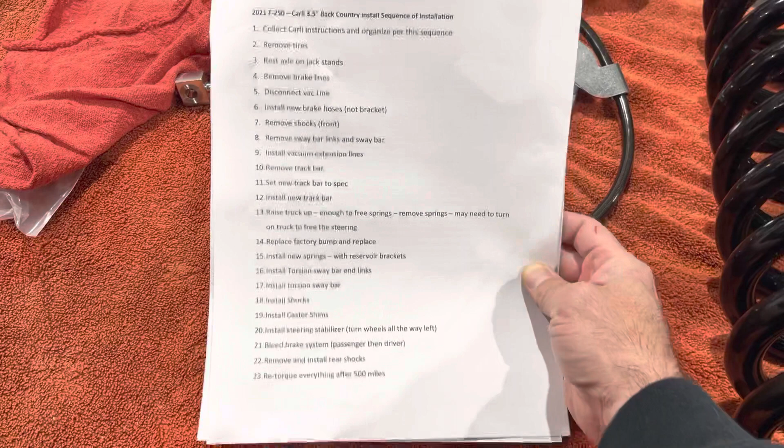First things first, I did a sequence of operations for how I'm going to disassemble and reassemble everything. Went through and figured this is the best way. If you want to pause, take a look - that's how we're going to run this.

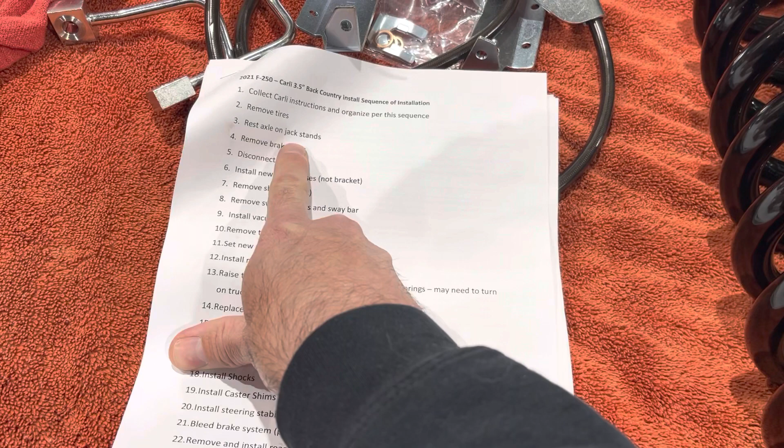I'm going to jump right into this. First things first, now we're going to start with removing the tires. We've got the front axle resting on some jack stands, so we'll start with removing the brake lines.

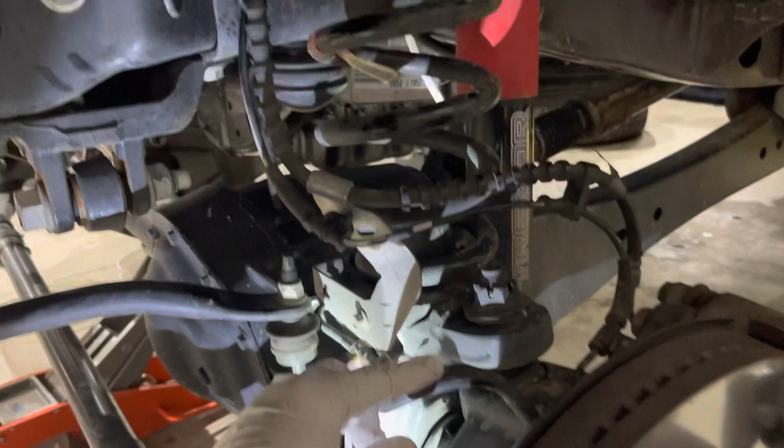We're starting off with the brake lines. We got the right side done already, moving on to the left side, driver's side. We're just disconnecting the ABS line right here, and we're going to disconnect the bracket, pull this vacuum hose off, and then we'll get to that spot in a sec.

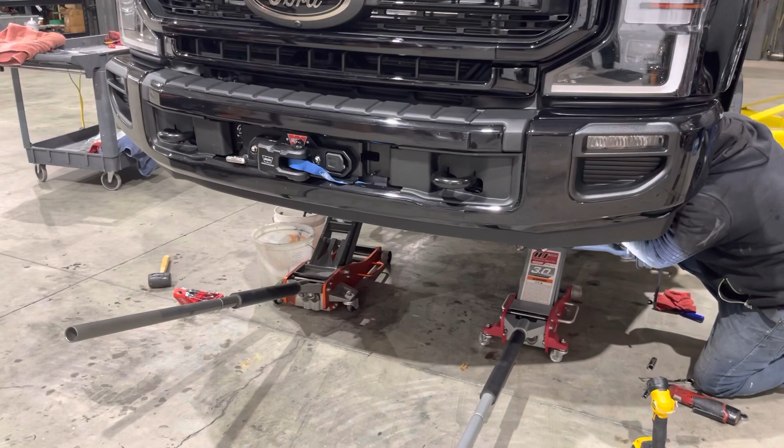I'm just going to talk about setting up the truck in the proper lift points and setup for this. Since we are going to droop the axle down, we are going to use the lift. But if you didn't have a lift in your garage and want to do this without one, same concept - you'll just have to lift the truck and support the axle with jack stands or jacks. This is the start of it here, and we'll be able to use the lift to raise the truck up and down when it comes to pulling out the springs and all that good jazz. So we'll get these brakes done and we'll be good to go.

All right, so we just disconnected the hard brake line from the flexible line. We'll end up pulling this out right here.

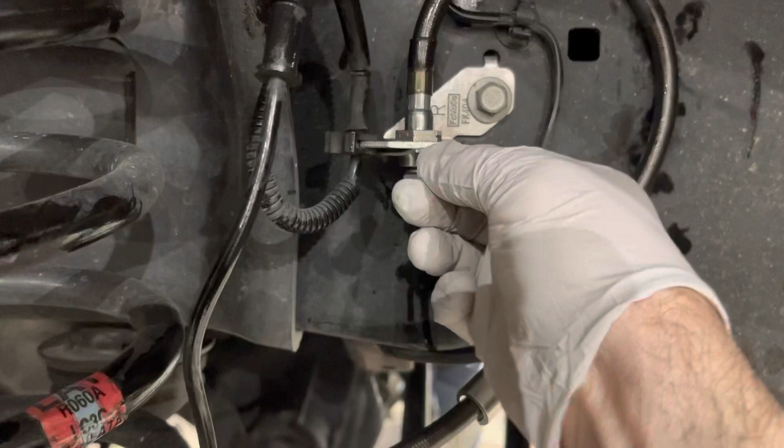All right, this right here is the passenger side. You want to make sure that when you refasten this, you've got a little clip that goes in and holds everything in place - that comes from Carli. This is the new Carli line. You want to make sure it routes around and touches the frame, comes down. We're going to leave that bracket loose for now. We just screwed that back in, and then we have our ABS and all that - we're going to secure all that later, leaving it loose for now so when we pull this out it doesn't get in the way.

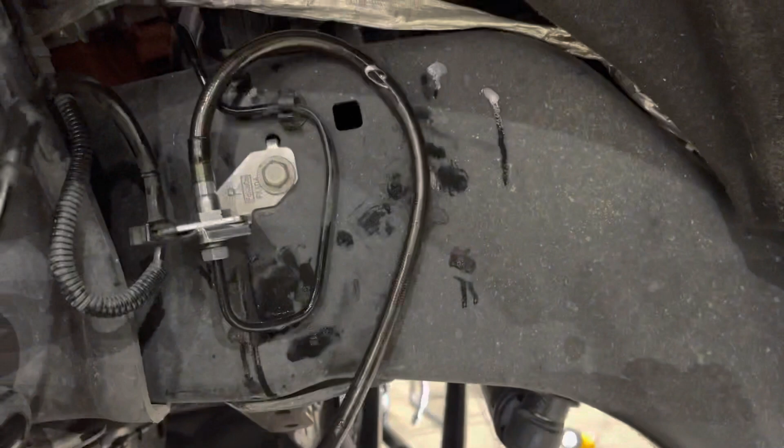And we are down, and we have used the two crush washers in there, and this is how it routes right up and over - pretty simple. Once you pull it apart, you'll get the gist. But the big thing is to make sure this is touching the frame and not sticking out in the wheel well.

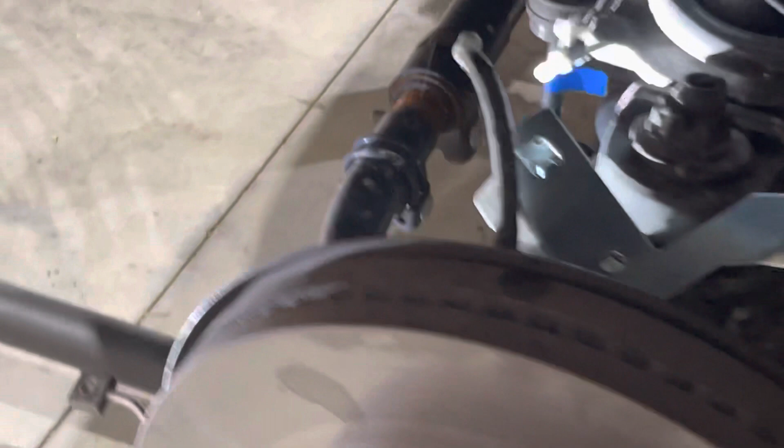Dripping fluid - we're catching it. Or are we? No, we're not. Oh well.

All right, brake lines are swapped out and hanging. We're going to move to the shocks - that's the next step here. We're just going to pull the front shocks off right now. We're not going to replace them yet, but we're going to get these shocks pulled out. We got a 21 millimeter at the top.

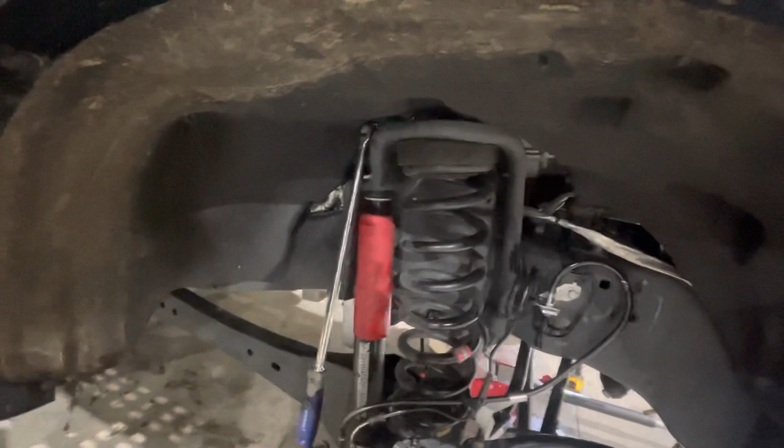We're using some pliers, some channel locks, or some Milwaukee's right in there - it's real skinny to get a wrench in. Got that, and we're going to throw a battery powered ratchet on there now that we broke it loose. Now we'll undo the lower shock mount, 19 millimeter socket, ripped right out.

All right, shock's off. We're on the other side, knocking it out. That's it - just getting that 21 millimeter loose. It's tied all the way up, all the threads, so I'll end up using a ratcheting wrench. It was easy, just how tight it is in there - couldn't get the battery ratchet in there. So food for thought: 21 millimeter and 19 down there.

Okay, we are now at number 8: remove sway bar links and sway bar. So we're going to go over and get working on this thing. We'll get the end links off, take those off first, and then move over to these brackets. I heard they're pretty damn tight, so we'll get the sucker removed.

Get these nasty little end links off. All right, sway bars off. Here we go.

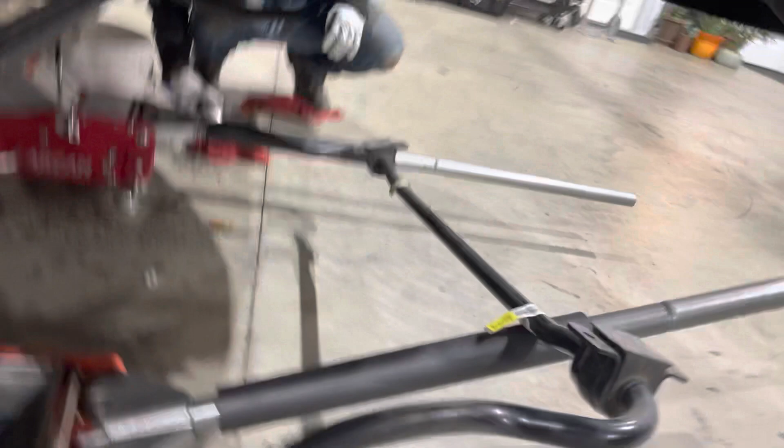And that's that. Replace this with the good old Torsion one. What we've been waiting for the past 5 months. Easy enough, moving on to the next task.

All right, we're moving on to the track bar. We're going to set the track bar first, then remove and install the new one at one time. We'll swap 11 and 10 if you want to. So first thing we're gonna do is clean the threads here.

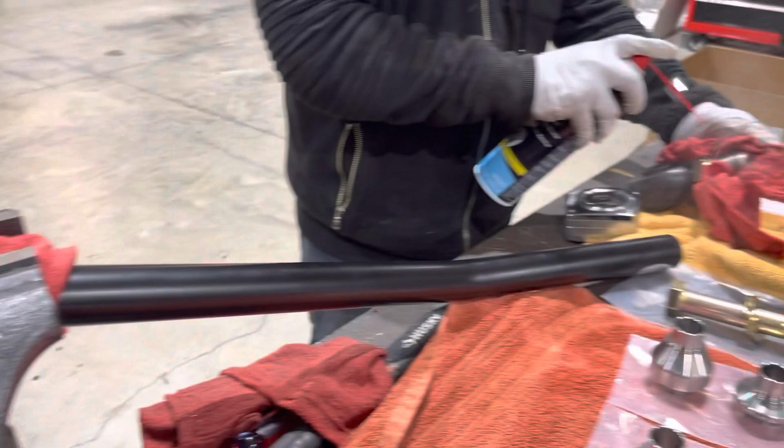We've got it pulled out, got it in a vise. I think Carli, or CJC, has a good video on this, but we're gonna set this thing to spec, 37 and some inches here. Put some red Loctite on it and go from there.

All right, we got it cleaned up. We got some Loctite on that sucker, and we're gonna go 37 and 5/16. So we got to go in 3/4 of an inch.

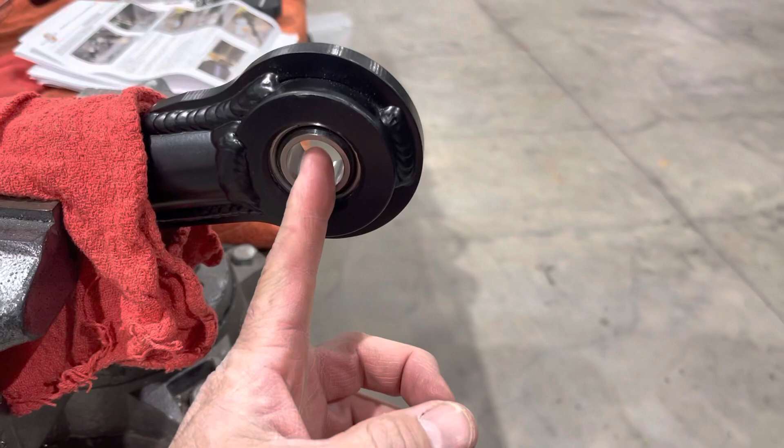All right, we measured it. We're at 37 and 5/16. I just put my knife in right here, had it come out in the middle, kind of as a marker. I mean, we're within, I'd say, less than a 16th, right where we need to be.

And we got our crow's foot on right here. We're torquing this thing down to, we're setting the torque wrench to 200. We're gonna use our crow's foot attachment there and crank it down.

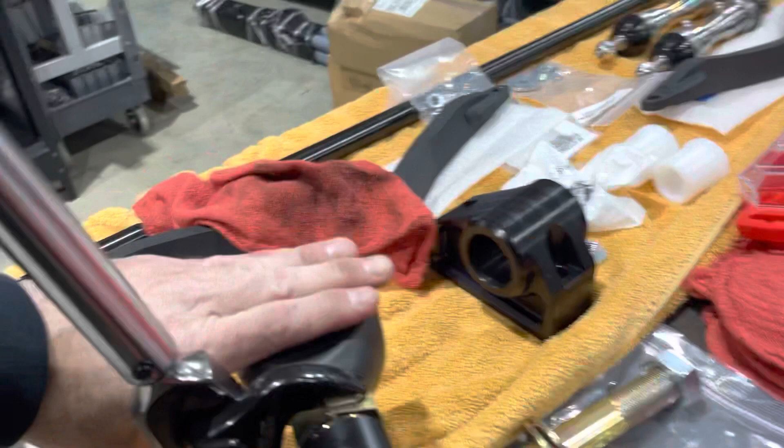All right, now we just want to make sure we got this thing nice and straight. We got a perpendicular on this thing, make sure this thing's level. So this wants to sit flat, and this wants to sit up and down.

So it's gonna take 2 of us. Be back with you in a sec. Trying to keep it level. It's moving, of course it's moving. Just kidding. All right, we relocated that to hold it nice and tight because it kept spinning the bar.

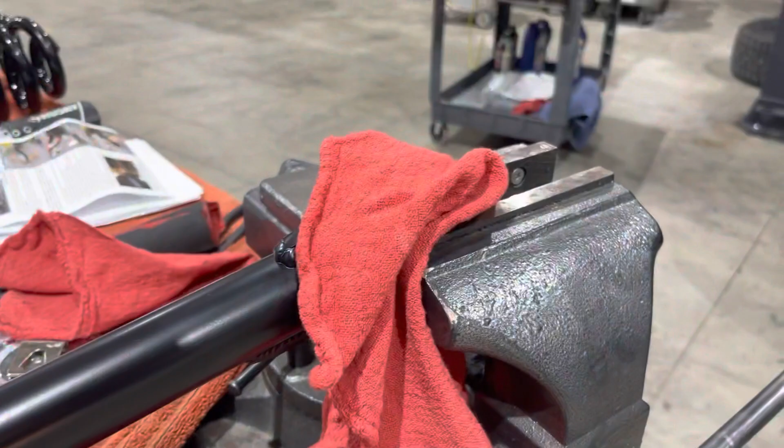So here we go. Jeez, all right. Boom, we're good. All right, we're starting on the track bar here.

30 millimeter, start off the top, get that loose, then we'll go down and work that ball joint. All right, get this ball joint out.

We're gonna have to use the puller. Not a big deal, so we're getting that in place right there. 17 millimeter, pull the sucker right out, and we'll be in business.

Just keep in mind where you place your jacks. This one's kind of in the way, but we're working around it. And obviously, if you're redoing the radius arms, you wouldn't want the jacks here either. Probably go on the axle, one on the axle and then one under the diff.

So let's get the sucker pulled out. How is it, is it tight? It can't.

All right, there's the 2 bars together, and you can see, line them up. Not much difference, huh? I don't know if the Tremor comes with a different track bar or not, but we're swapping this one out.

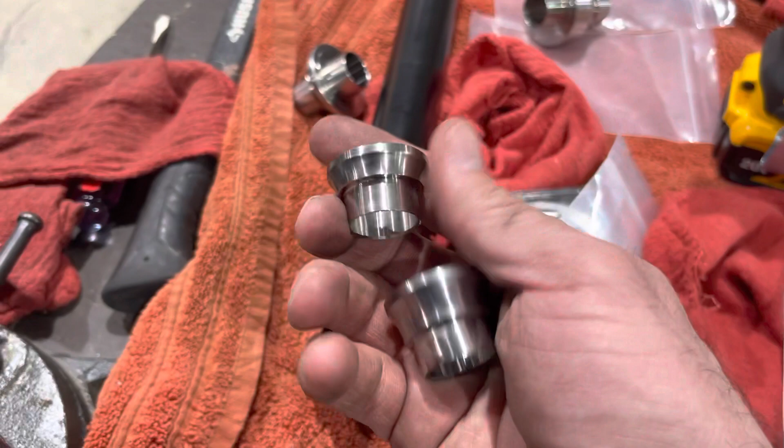All right, we're getting ready to get this thing, the track bar, on. It comes with 2 of these. This is going to be towards the front, this is towards the back. Thin one, front. Thick one, back. All right, we're good.

Let's get this thing in place. Okay, we got the track bar up on driver's side. It's in there loose right now. Used a rubber mallet, a little bit of persuasion, got it where it needed to be.

All right, we're just using the pick to get these spacers in place around the rubber gasket. Should have done that earlier, but we didn't, so now we're doing it now. Don't forget. All right, we got her in, made sure it's all the rubber seals around the spacers.

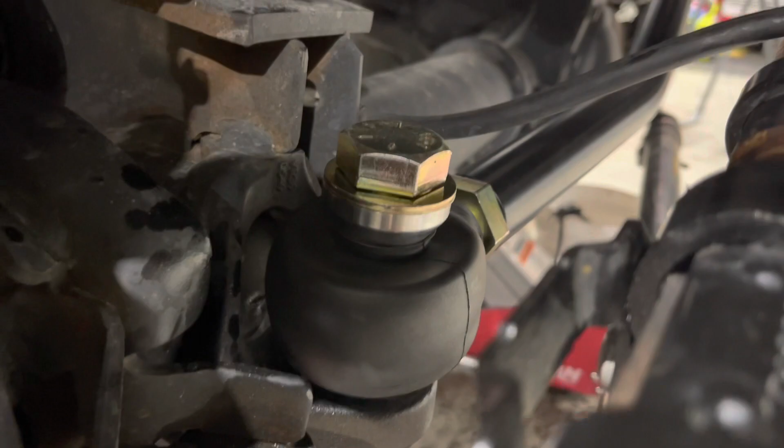We're going to torque this thing down to 250 foot-pounds with a 33 millimeter.

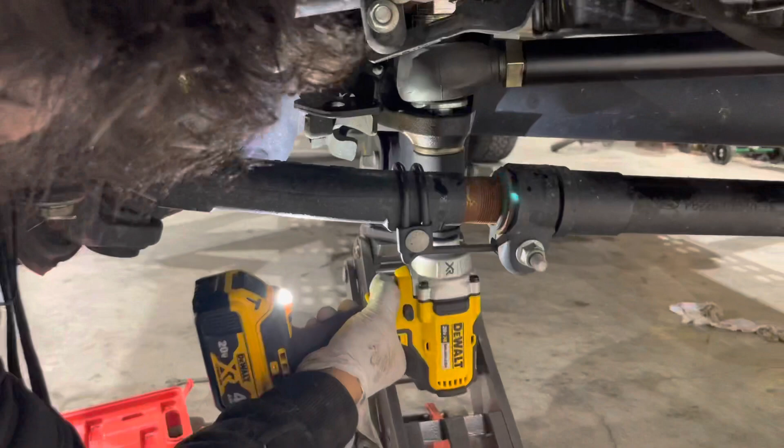Torque it down to 250. I'm going to set this down because I can do it one-handed. Here you go, you hold that. Boom.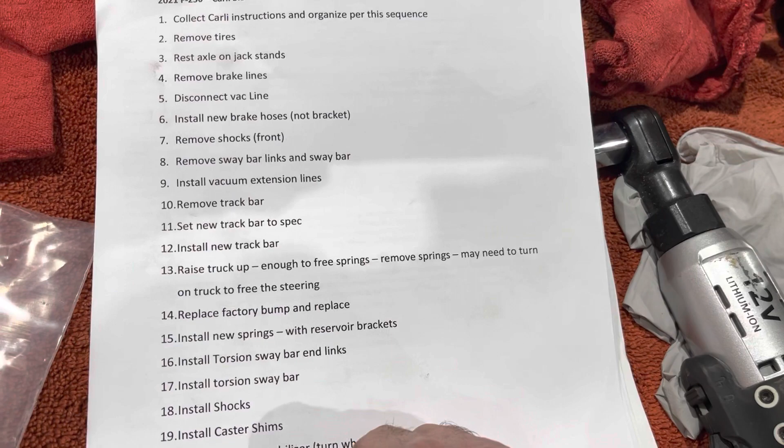All right, we're gonna raise the truck up to free the springs, remove them, and we may just turn on the truck to free up the steering a little bit. Let's get these springs out.

All right, well, you guys came too late. You missed us pulling these out. They came right out. We got a rubber gasket over there. Everything's good to go.

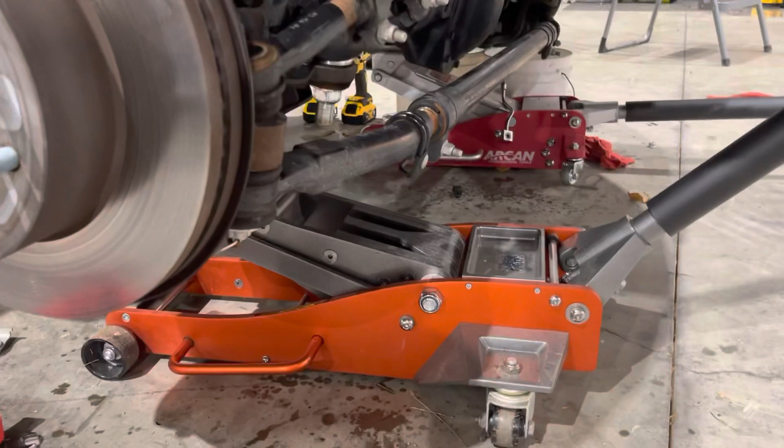All we did was lower these jack stands right here enough to get the coils out. But you really want to make sure you've got your track bar in place to hold your suspension together.

And we're not doing radius arms, so put the new ones in, and we're gonna work that shock tower bracket for the reservoirs. All right, we torqued it down.

Put this little rubber guy back in. He just snaps right in. That's all she wrote. Fancy.

All right, bump stops are replaced. Now we're gonna put the new springs with the reservoir bracket. Here we go, let's do a comparison.

Oldie and the new guys, here you go. A lot different. All right, let's get to it.

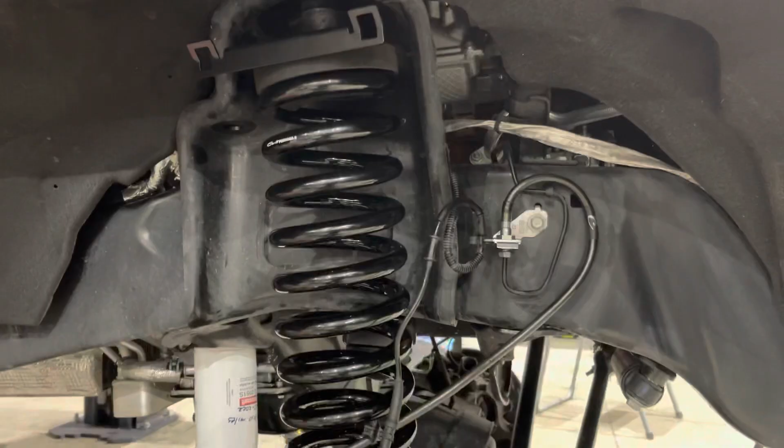All right, we got the first coil spring in. Don't forget your bracket, and there we go. I think we're gonna leave it to where it says Carli Ford 2.5 right there. We should be good to go. It's tight, man, it's tight.

The vacuum line on the diff is stretched to the max, so let's get the other side. So this taper here, what we want to do is insert it up there first with everything, then get it in and slide it in this way. All right, it's a pain.

I'm gonna try lowering just a little bit. Oh yeah, that's gonna help you big time. You're in now, you're in. There we go. A little finesse, I think we're good. That's it, beautiful. That coil's gonna sit where it sits, right? Yeah, that's it. All right, coil's gonna sit where it sits. That's what she said. All right.

All right, moving on. Install torsion sway bar. All right, we're on it. So we're gonna get these bushings in the bracket, and then we're gonna drive them onto the spline here.

And that's gonna get this basically set up to fit up into the truck. I know we're gonna leave 1.25 inches sticking out here, but we'll get to that in a second.

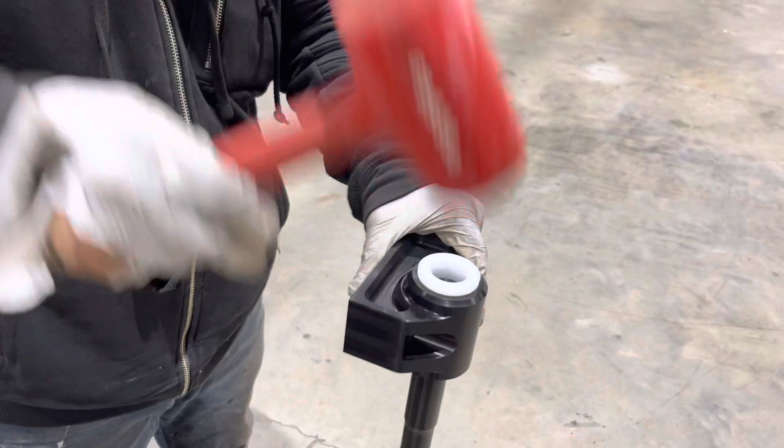All right, first one, got a piece of wood down there. Mallet this thing on, and once that spline comes out, we're gonna use this socket and slam it down 1.25 inches more. All right, we got it down to 1 inch. Inch and a quarter on the money right there. Boom, good. All right, repeat.

Do the same side, make sure it's even, even Steven right there, and you'll be good to go. Okay, next we got this sucker ready to go on.

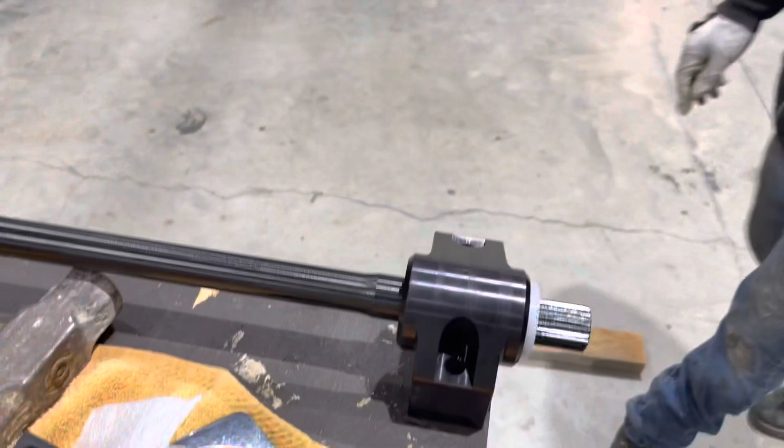We're gonna take some studs out where the old sway bar was, and those will pop right off with some clips, and then we'll install these guys, prep it for this torsion bar.

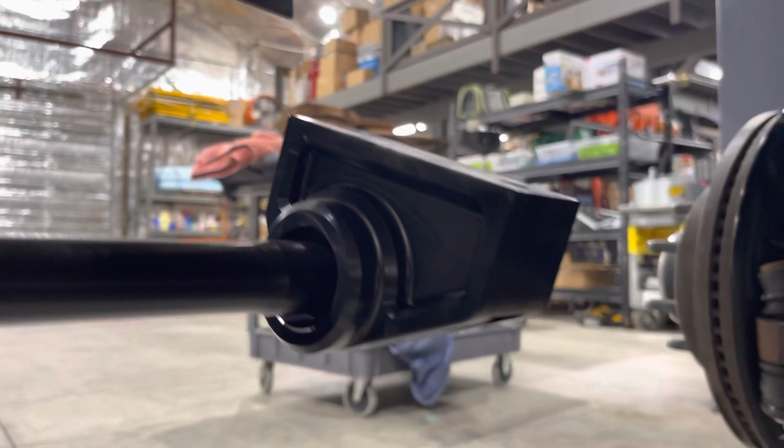Okay, now that we got these little brackets in, we're gonna go ahead and throw the bar up. Long side to the rear, short side to the front. All right, we're gonna hand tighten these for now.

Since it's gonna take 2 people, I'm gonna stop recording. We got it one in there. You're gonna probably want to pick it to realign the bolt up with the actual threaded bracket behind the frame there. Using a 9/16 deep socket is a great way to get your fingers around that bolt. So, little tricks of the trade there.

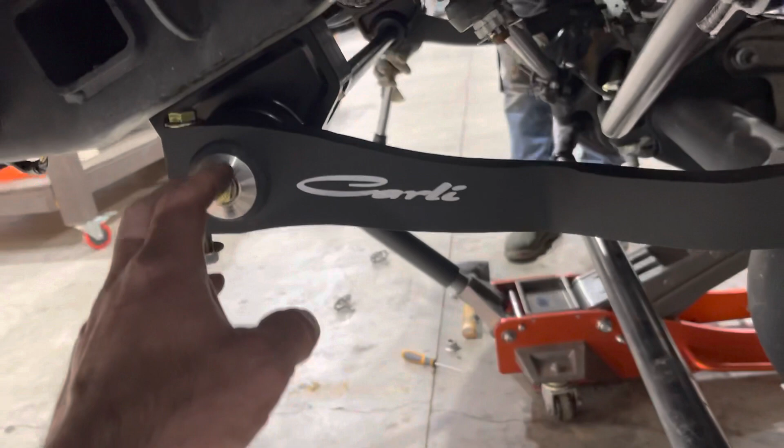All right, so kind of got ahead of myself here, forgot to film this part, but we installed this bracket with the torsion bar in it. So we hammered the spline on, and it's great to have 2 people on this to make sure it's lined up. You can see if the spline's off, it could screw everything up, but it goes right on.

So what we've done here, we get it in. You hammer it until you've got a 1/16 of an inch from the spline to the outside face of this bracket, and then you put on the large washer, the crush washer or lock washer, and the 3/8 bolt. And then what we're doing now is we're torquing it down.

Driver's side 10, passenger side 10, 15, 15, 20, 20, and I think we're on 25 now, right? Yeah, and that's it. We torque it down to 25, and we'll double check each side, but it's important that you alternate and preload that torque all the way to 25 evenly from left to right, whatever. It's been a long day.

But yeah, here we go. All right, here's the other side. So this is a 9/16, and this is a 9/16, and that's a 9/16. So this is all 9/16 here. What we're gonna do is get a 9/16 wrench and a socket and get that one down. Both sides, we're gonna pinch this thing to 35 foot-pounds.

Now we're torquing, going back to the spline bar there, the brackets, and we're torquing that down to 40 foot-pounds. Previously, we just hand-tightened them to 5. So that pretty much squares away the torsion portion of the install.

Okay, end links, here we go. So one thing, look, these are loose. If you can move them by hand, we have to undo the set screw, tighten this down to where these are kind of difficult to move, reset the set screw. So I'm gonna go ahead and do that.

Go from there. All right, and I'm gonna use some blue Loctite on these set screws here because, well, you over-torque them and it ruins your day. So make sure you blue Loctite your set screws throughout.

All right, so what we're gonna do here is install the bottom first, thread it a little bit, and then bring the top in. Make sure your grease points are accessible. You've kind of gotta grease that every 5,000 miles. So we're gonna get to it.

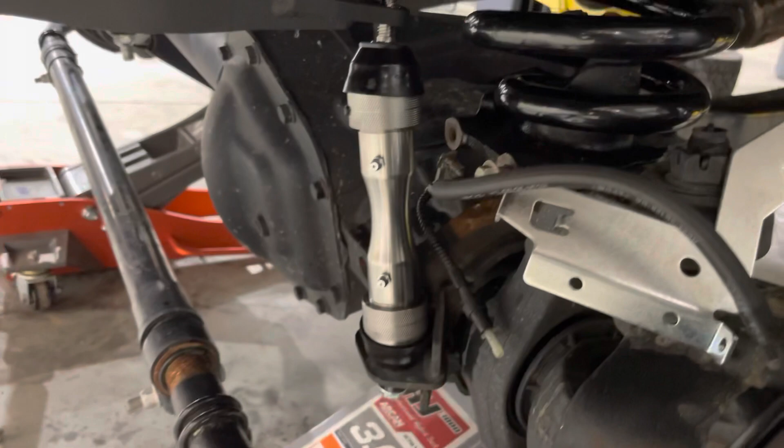We got that in place. Since it's at full droop right now, probably more than full droop, we are going to— these are at an angle, so we're gonna go ahead and use a 5/16 up here and an 11/16 to tighten this sucker down. Hold the stud in place, tighten it down, boom, boom, and I'll be back with the torque specs. But that's what it looks like so far.

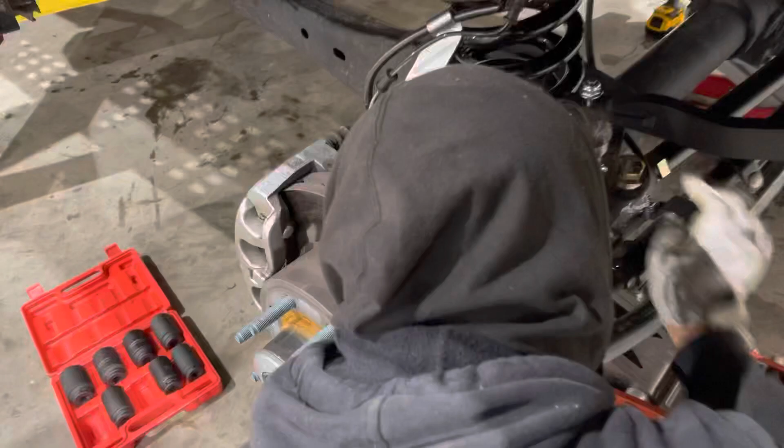Sick. All right, got the grease gun. I'm greasing. He's torquing these things down right now. You can see.

Making it happen. We're gonna torque these down to 30 foot-pounds, I think — gotta double check the spec. All right, we got these things torqued down to 30. Greased them up. Looks like, is this a Zerk fitting? Looks like it's squirting out there.

They're tight. But yeah, we greased them up, they're ready to go, and now we're gonna move on to the shocks. Let's get them in.

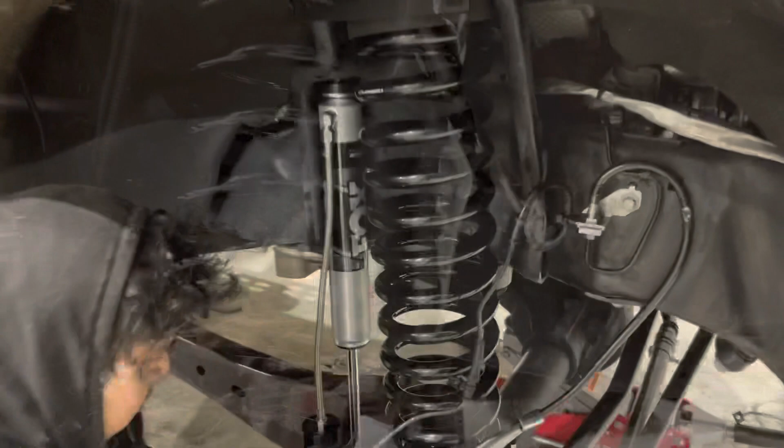All right, we're getting the shock in. If you follow the directions that Carli gives you, it just doesn't work. Stickers definitely don't line up. I know they say don't worry about it, but we're gonna mess around with it here and see what we can do. Not the end of the world, but yeah, that works just like that.

All right, so we just angle it. Yeah, we'll just angle it there. That's a good look, perfect.

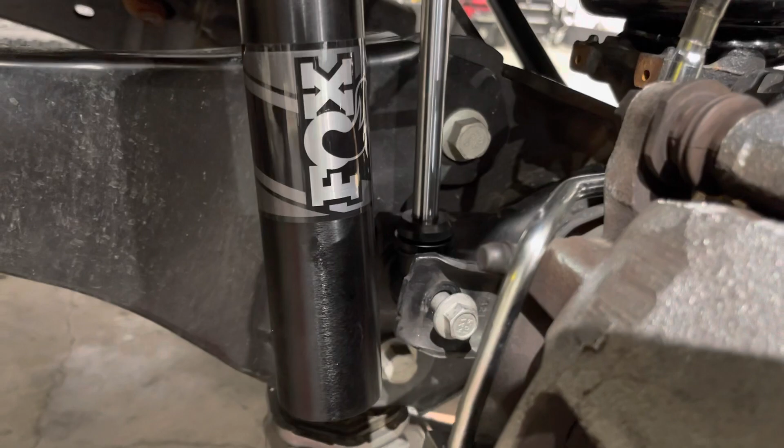All right, we'll get these things tightened up. Instead of compressing the shock, we just put it in and droop the suspension. It's easy because we've got the jack stands—really helpful to do it that way. We got that, and we'll torque that thing down to 100, and then we'll get working on the top.

All right, for the top, we're just going to torque that down till it preloads the bushings. Kind of use your best judgment there—you don't want to overdo it, and you don't want to underdo it.

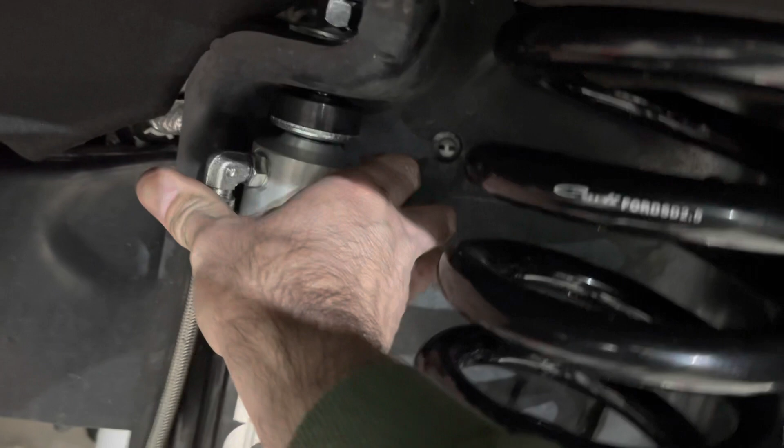All right, just make sure you angle this correctly. Double check to make sure your reservoirs are where you want them, and by swinging the shock left and right, you can go from there. So keep that in mind. Ours is going to be about this location here on the passenger side.

All right, we got the shock in place. That's where I have it right now.

It's pretty flush here, and it starts sticking out, but that's where this sits. So mess around with it. It's easy to move around, undo the 2 screws up here or hose clamps, and this thing spins. So I can adjust that later on when I pull everything off at 500 miles.

Did that, and we went ahead and torqued down this new bracket. Then we ran our vacuum line through it back in place. I'm probably just gonna cut this little clip that used to clip in the old steel bracket here, but I think we're just gonna zip tie this here to 2 spots. Boom, boom, call it a day.

The ABS, and we still gotta bleed, but I've got a few more things to do here, but there it is, and repeat on the other side.

All right, now that we have the shocks in place, that's kind of our limit strap to keep the suspension from fully falling out from the truck.

So we're gonna get up and we're gonna get that steering stabilizer replaced with the new badass one. All right, but yeah, so far that's where we're at.

You can see everything's kind of shifted, it just droops. And that's where it is, but obviously when we compress it back up, it should line back up and drive straight, in theory. All right, but this is where we're at so far.

Pretty sweet little setup here. I really got to watch these hoses. I'm not a big fan of how they're sitting, but I'll keep you posted. All right, let's get it done.

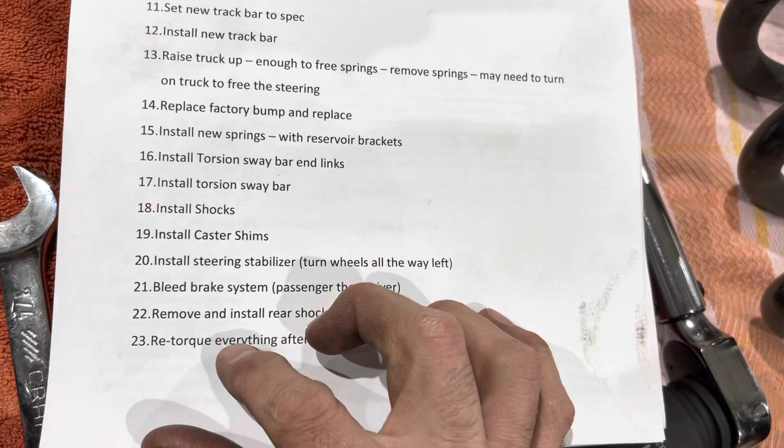Okay, we installed the front shocks. I said shocks, I got rear shocks somewhere. Yeah, right here. Okay, but instead of doing the caster shims, we're just gonna do the steering stabilizer first, then we'll move to the caster shims. Go from there.

All right, got that stabilizer off the frame right here. You can see it's hanging. Now we're gonna have the drag link here.

The word on the street is it's a pain in the ass to get out. I don't know, you tell me. So we're gonna work at that. We could use a puller, a sledgehammer.

Don't hit my... All right, now we're gonna get the steering stabilizer on. Got the hardware, we already got the bracket and the wedge up there.

Well, bracket's in our hands, but there that is. Put that in, and we'll go from there. All right, we got it in place.

Torque it down to 40 pounds per square inch. No, pounds per foot. That's right, foot-pounds. Whatever you want to call it.

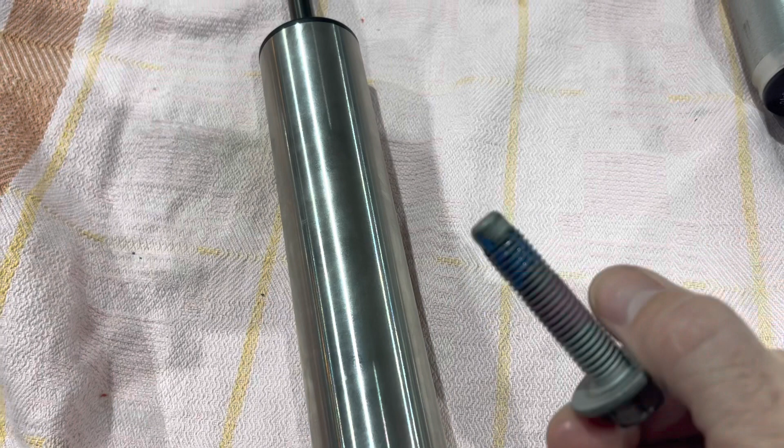Okay, so we got blue Loctite on both ends of the stabilizer. This is the original bolt from the original stabilizer. Put a little on that, and that's going to go towards the frame. And that'll go on the other side.

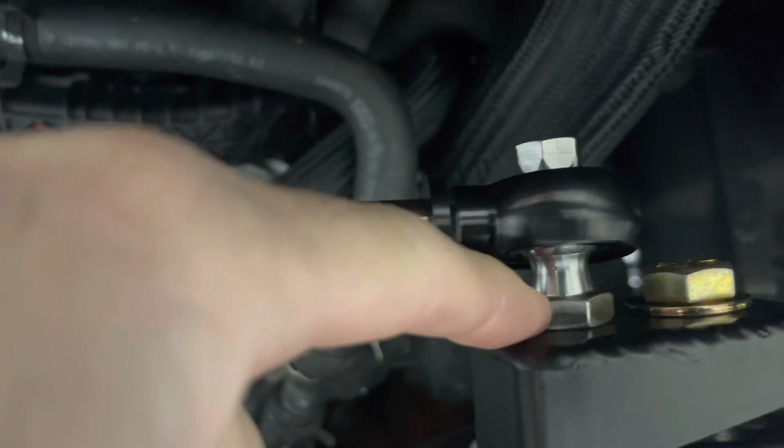And the drag link. All right, we got the drag link portion installed. Do it from here, not here. This could break, so you want to use a 3/4 on that guy.

All right, we're gonna go and throw it up on the frame now with the existing bolt and the provided spacers.

All right, we push this sucker in. Make sure you have your wheels turned to the left. And we pushed it in, threaded up the existing bolt. Now we're gonna torque it down to 30 pounds with the 15 mil.

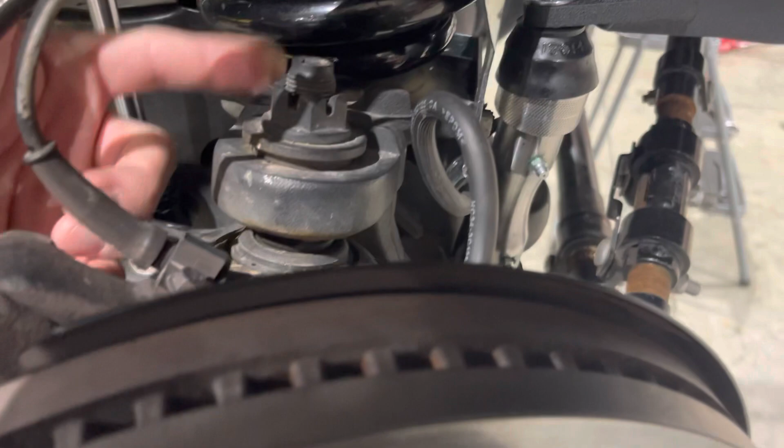Now we're gonna work on the caster shims. Gonna remove this castle nut. It's got a cotter pin, we already got it out. We'll get that up, bring it up, and there's plenty of videos on YouTube on how to do this one and all that. So these should come out pretty simple.

We'll move it up here and then slam it with the socket until this rattles loose. Pull it out, put the new one in, and move on. Torque it back down.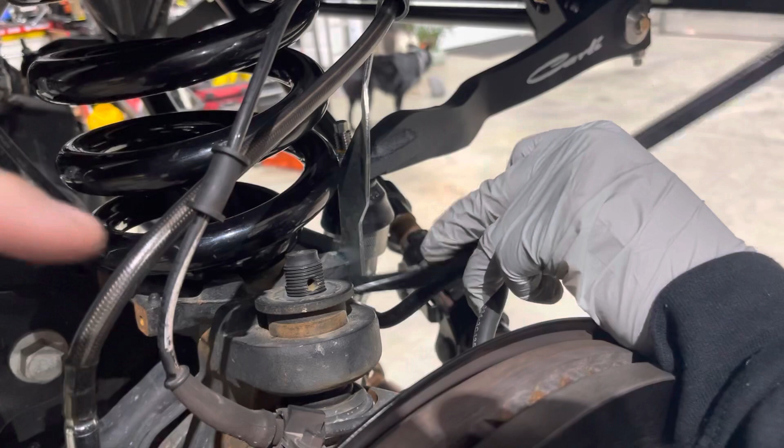Let's get to it. All right, we couldn't get the socket in because it was touching the coil there, or the spring. So we used just the ball peen. Smacked it a couple times, came right out.

There we go, let's put the new one in. All right, we cleaned this sucker out, and

we're gonna put these lines, they're gonna go directly towards the back right here. Smack this thing in. All right, we got it almost seated.

One thing you could do, put this in before you put your coils in, and the springs will get in your way if you don't. So much easier if you do it this way. So my sequence, I'm gonna adjust it at the end of the video.

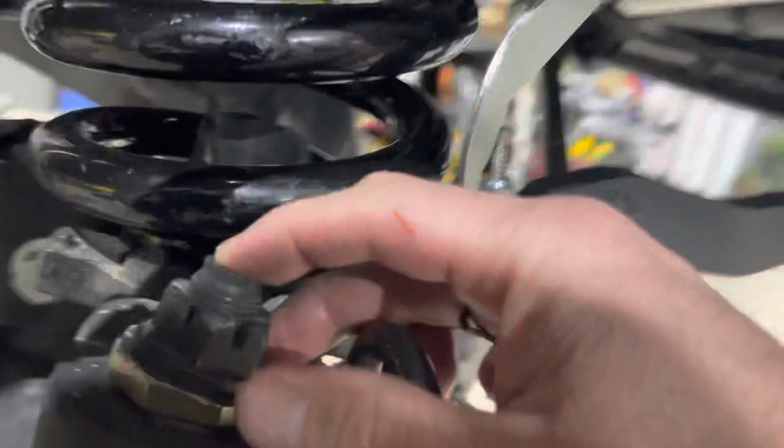All right, 69 foot-pound torque on that guy. They do that, I think, because... well, it's 69, geez. No, so you can spin it a little more to get the cotter pin back in. So they go to 69 to give you that extra foot-pound to figure your life out.

Okay, shim is in. We just did a sixteenth of a turn, if that, just got it in place. Put the old pin back in place. If you have new ones, go for it, but I don't have that size on hand right now, so just reuse the old one. Let's move over to the next side.

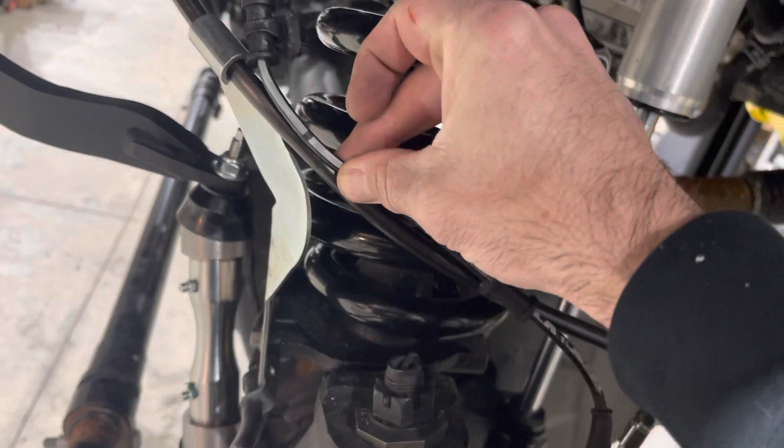Okay, caster shims are in, pointed towards the rear, that little line, we're good to go. Basically, we got to strap the ABS lines down. Everything else is tightened here. Vacuum lines are in, we cranked the new bracket down, and obviously you've seen everything else is done. Shocks, again, this is how I see it on most vehicles, and even on CJC's videos with the back country kit, it's how they had the reservoirs mounted, so we're good there, I think.

We'll see. And now we just gotta bleed the brakes. Come over here, we'll bleed them, and before we do that, I think we're just gonna do the rears real quick, get those rear shocks off and replace them. Lower it down, and then take this thing for a test drive after we bleed the brakes.

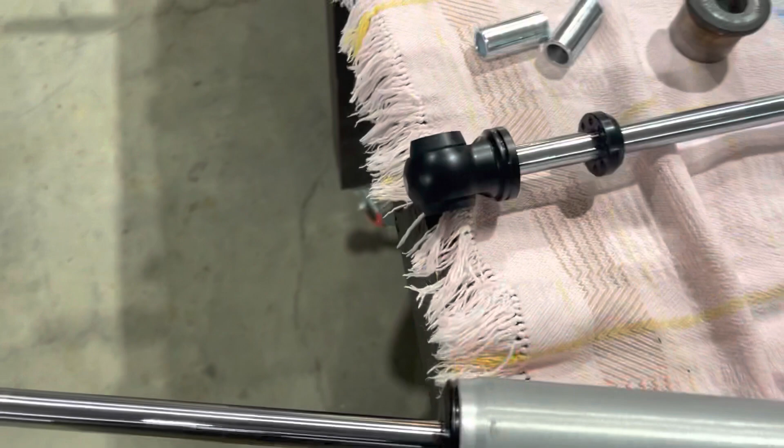All right, rear shocks. For the 2017 and up, they use the 14mm crush sleeve for the lower portion, so we'll press that in. And then we got to put these brackets on. I'm gonna kind of fit it - I think I'm gonna go right below, right there. Wedge it.

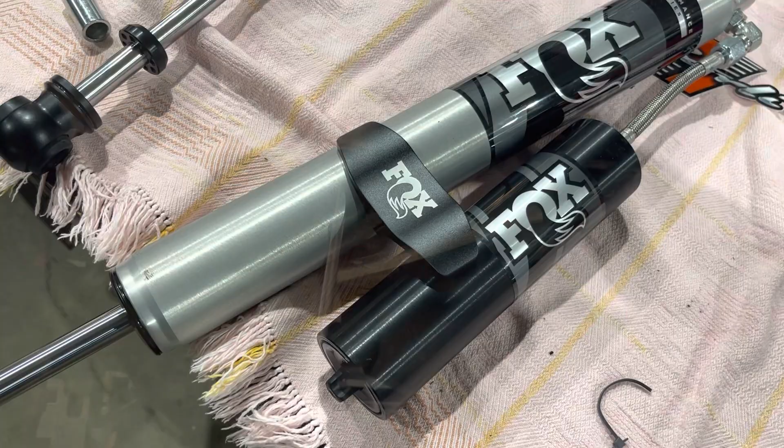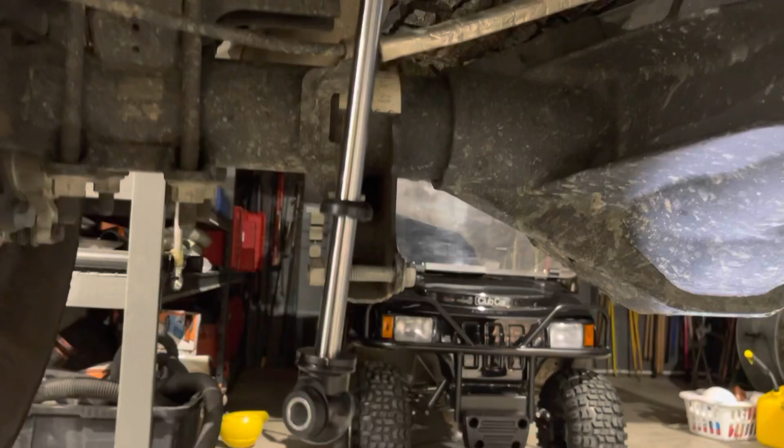Not to kink the cable, but get this going. Okay, passenger side, reservoir facing away from the axle. We're going to use the existing hardware, torque it down to 35 foot-pounds. Pounds-foot, tomato, tomato. Torque these suckers down to 35 foot-pounds.

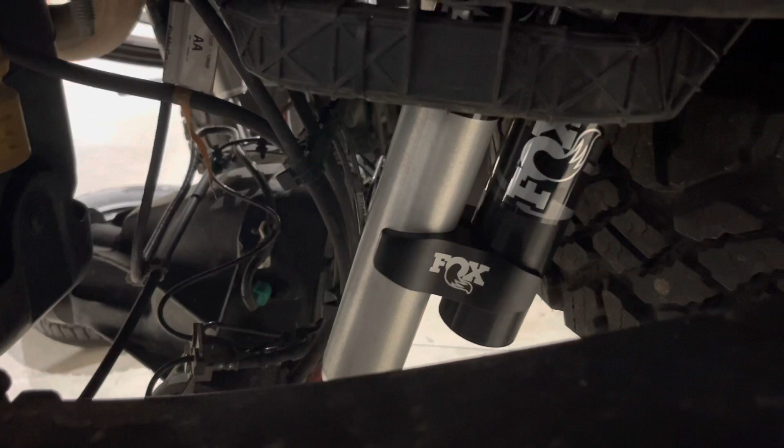All right, driver's side, we got it in. Gotta reach up under the spare tire. That was fun, but we got it, torque it down.

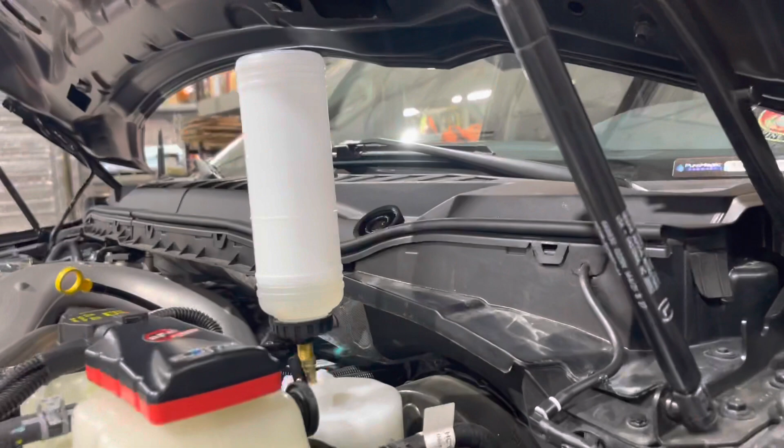All right, bleed the brakes. Having fun, it's taking a while. But not sucking any air, about ready to refill this thing in a second. But yep, we're doing the passenger side first, and we'll move over to the driver's side after we get this thing good to go.

Brakes are bled, and we are coming down, got the wheels on. Let's watch everything shift, maybe. There it goes, it's shifting. Look at those, letting the whole suspension sit right where it needs to go. And we're probably gonna have to drive it a little bit. It shifted pretty good, all right, there it is.

We got some room now. All right, we're gonna torque the wheels down and get right back to it.

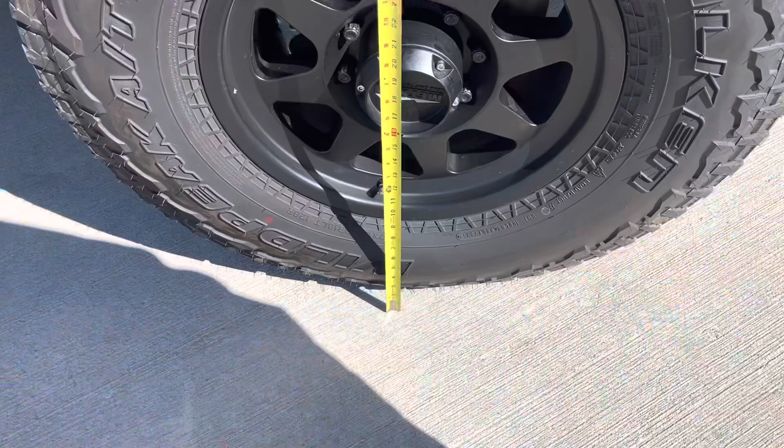All right, I'm gonna do a measurement here on the front. Yeah, it was my bad, I did not measure the truck before I did the kit. We were way too busy working, but this is where we're at here. So you saw that, you can pause it if you want to see the measurement, but just to give you an idea, I don't know, it doesn't really bother me, but some people want to know before they go. Yeah, that's what we got. So I think it's just 9.5 inches right there. I think before, I would say it was about 6 inches, 7, about 7, I don't know.

And here's the rear. So I know there was somebody who wanted to know what the rear was. Damn wind. So we're at a total of just under 45 inches there, so 45 inches. Definitely got a little bit more here. Oh shoot, what are we, 9? Just under 10 inches. So an inch higher in the back.

That's it right there. Boom, look at the way she sits. I'm gonna say that's a win in my book. Definitely feel it getting up. I know the front's gonna sag a little bit, it's gonna settle, and we'll probably lose about a half inch once it settles.

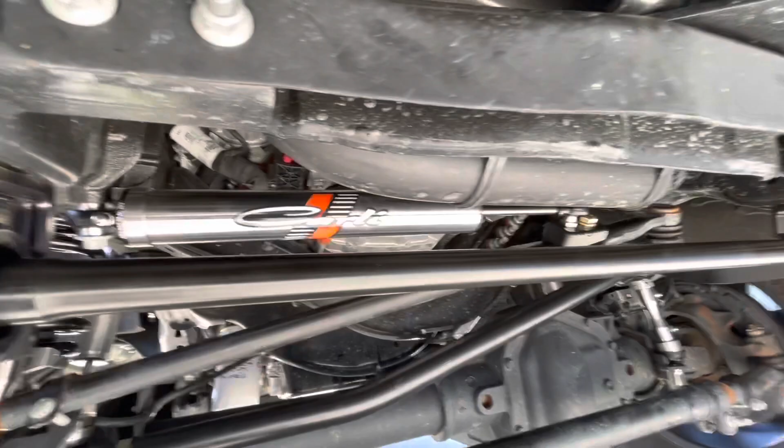But man, the transition coming into my driveway with that sway bar is night and day, I will tell you. But that's where we sit, right there. Let me know what you think.